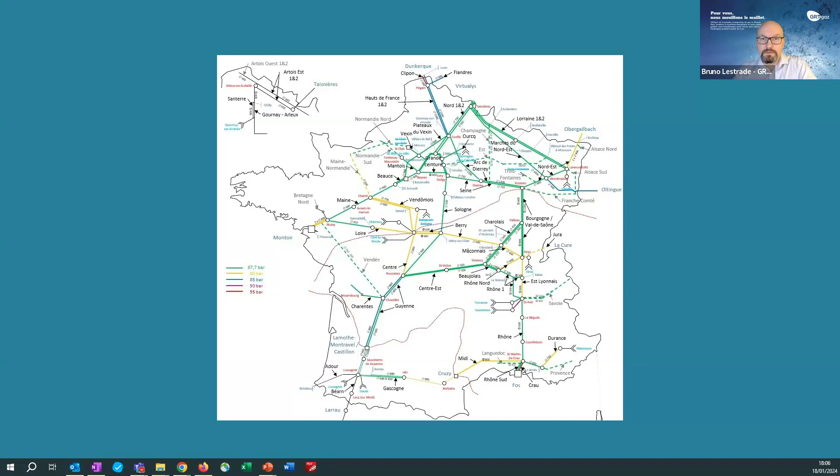If you can maybe switch back to the presentation. I don't know who is presenting. Alice, are you there? Okay, so I'm gonna present. Please come back. No worry. Alice? Sorry, I think I was disconnected. Let me. Can you present again?

Yes, sorry. No problem. So the idea was to bring together the best experts that we have at GRTgaz on one side and at RTE on the other side, and try to really bring on paper all the hypotheses you need to take into account when you start thinking on how to build a hydrogen network. As you may or may not know, hydrogen is mostly considered to be in the future produced by electricity conversion through electrolyzers, and this will require lots of power. So it will have an impact on the power system infrastructure.

And you have to decide, if you start to think on how to implement the infrastructure in the future, whether you're going to put the electrolyzer next to the consumption site, and therefore you will have to bring electricity to the consumption site, or if you put the electrolyzer at the production site, the electricity production site, and then, of course, transport that hydrogen to the consumer. And that was the start of that thinking in how do we decide what is the best option.

So we brought together the best estimate that we have on how the hydrogen market will be in the future, how much it costs to build hydrogen infrastructure. And because we wanted to make that study the most robust, we decided to make a consultation. We published at the end of 2022 the main hypotheses that we were going to take to conduct that study. And we sent that to our main stakeholders, and they had the opportunity to comment, to bring back different hypotheses, especially in terms of hydrogen storage.

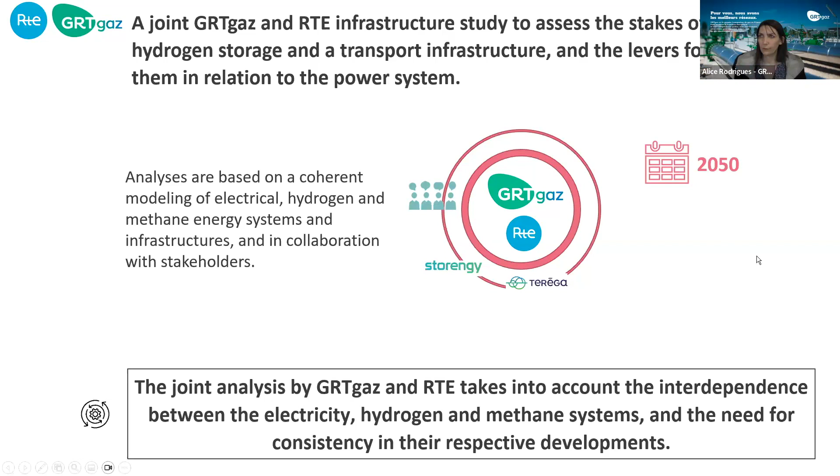The three main objectives. Well, the first non-objective was not to try to determine what is the best energy mix for the French electricity system. That was not the purpose of that study. RTE is looking at that. They made a lot of publications on that perspective. GRTgaz is also doing that for natural gas, biogas, and hydrogen. That was not the aim of that study. The study was just to try to see how you build an infrastructure.

So the first point was to try to see if you foresee a low final hydrogen market by 2030, by 2050, does it still make sense to build hydrogen infrastructure for such a low final hydrogen? That was the first thing we wanted to prove, or maybe not prove.

The second point was, of course, to try to draw the main costs and benefits that are associated with a flexible hydrogen system, and I will come back later on to the definition of what we consider to be a flexible hydrogen system. And then, of course, when you do such a study, you try to determine the sensitivity on your different hypotheses to see if you change one hypothesis, whether the result is changing or not. So those were the three main points.

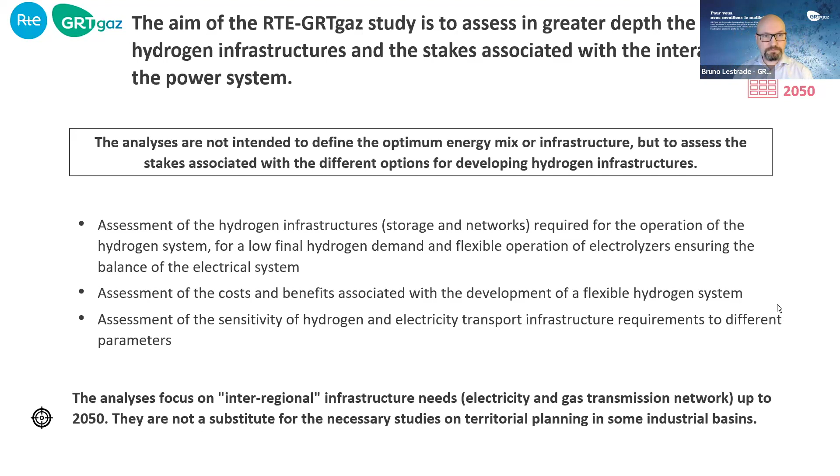And last but not least, because we are a TSO and not a regional or local system operator, we focused on the big picture. So we were looking at regional equilibrium, national equilibrium. We did not go into the detail of the main cities or the suburbs or stuff like that. We really looked at the big picture to start with. And the next slide, please.

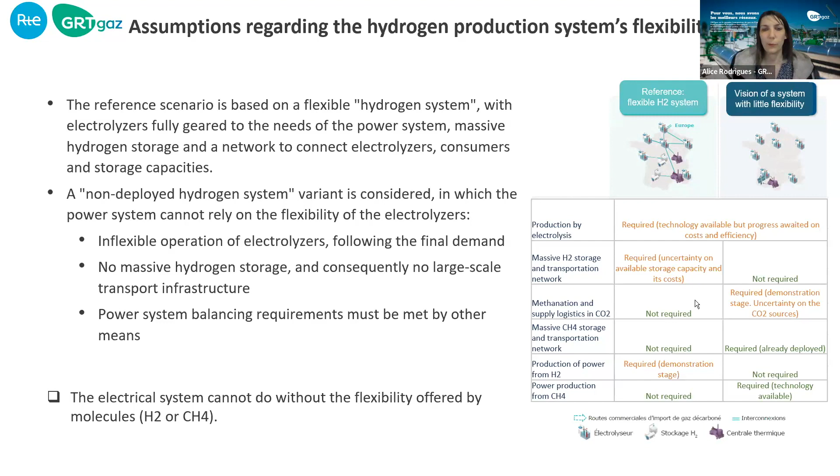And so, in the case where the electrolyzers are not flexible at all, it means that they are functioning all year long as well, no matter the availability of renewable electricity, which means that when there is a lot of renewable electricity available, there is a lot that is not valued because there are no electrolyzers for it. And on the contrary, when we are on the peak days where no renewable electricity is available, then the power grid needs to call for CCGTs to produce electricity.

But at the same time, the electrolyzers are still working. So we are in a sort of shadow situation where we are using methane to produce power, to produce hydrogen, with all the efficiency that we know when we multiply such combinations. And of course, we need the CCGTs, so we need a peak capacity to answer those situations.

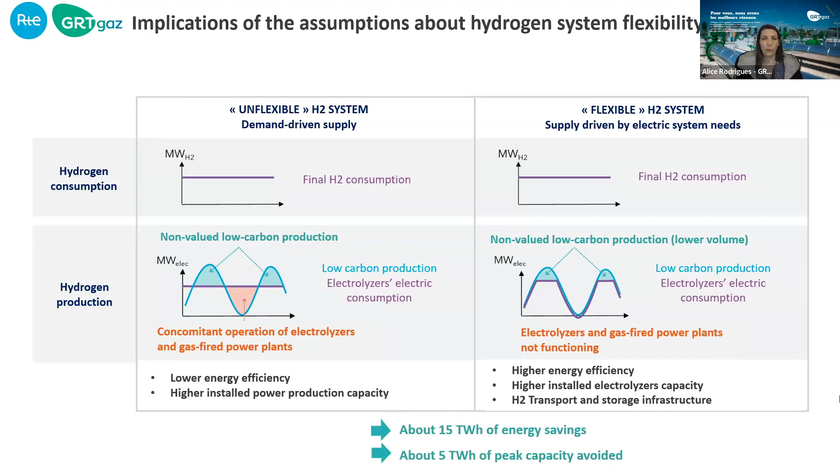One question about the production of hydrogen through electricity versus the production of hydrogen through the steam methane reformer. What are the advantages and disadvantages?

Well, if we speak of today, 2024, electrolyzers are only a beginning technology, so we don't have yet a lot of history and records about it, and therefore it costs more than steam methane reforming. But at the horizon of the study in 2050, we hope for the climate that there will be no steam methane reforming anymore. Well, that's the tendency that we see in all publications about the subject. That's what's in the Futurs Énergétiques. So that's the hypothesis that we have taken into account. Bruno, you're more expert than me on the technologies.

It's also that if we wanted to compare low carbon hydrogen production, you have to compare low carbon electricity electrolyzers with steam methane reforming combined with CCUS.

If you do so, if you consider only the SMR, you don't have an impact on the electricity network. However, you need a CO2 network. So that would have been a completely different study with a hydrogen network, CO2 network, and methane network. Because if you estimate that your hydrogen in the future will be produced by methane, then you will also have an impact on the methane network.

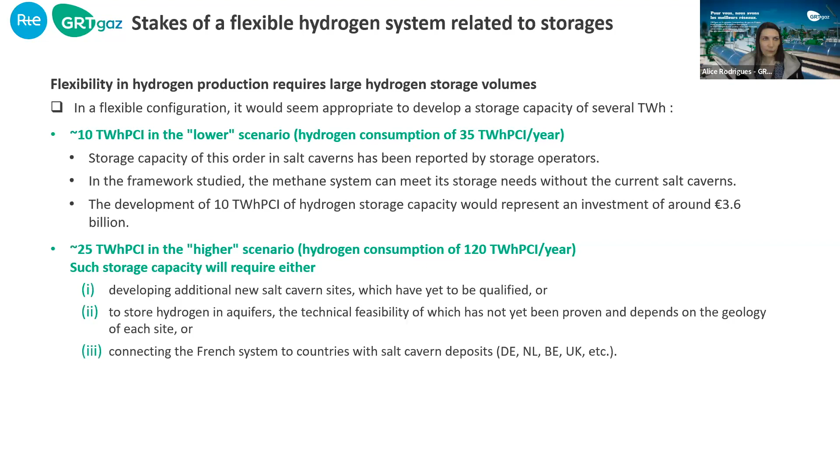Next slide, talking about money. If you can.

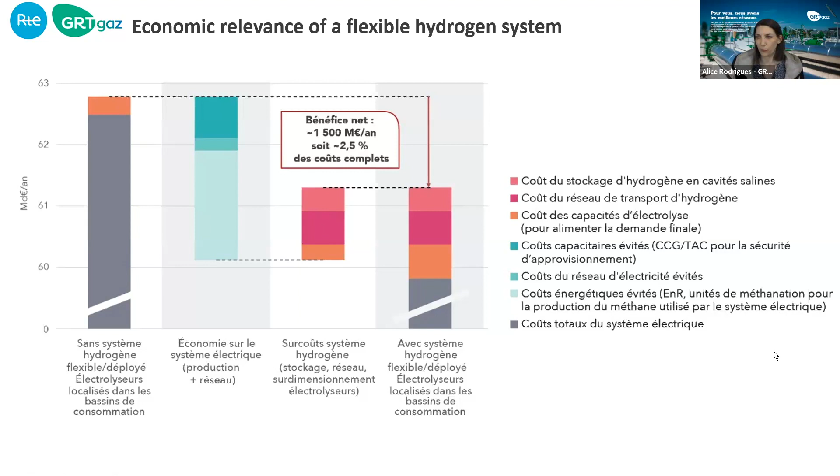There was a question; one of the objectives was to see if there is an impact on where we put the electrolyzer, if they're more near the consumption site or near the renewable electricity production sites. And in fact, it doesn't matter that much. We will see the economics about that, but again, we always need to connect the storages. No matter what the electrolyzer, we need to connect the consumption and the storages, which means that the final map is always more or less the same.

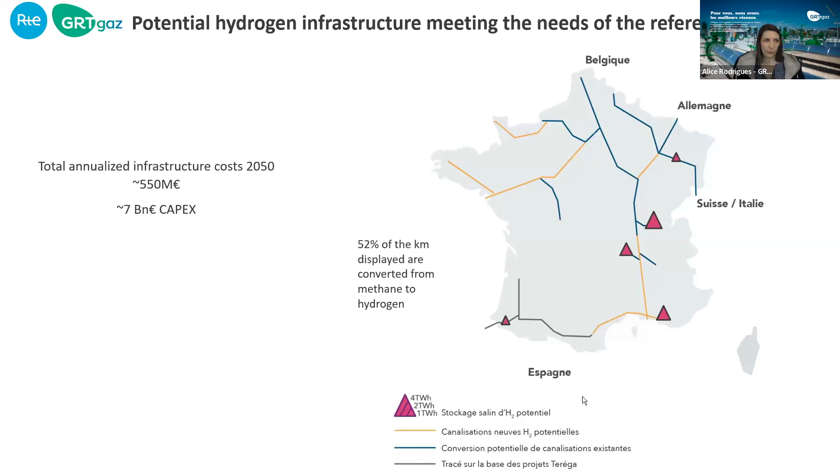So when we have shown those numbers and those maps to the public authorities, they have been a little bit impressed, because when you see all the network that needs to be built all at once, it may seem a lot. And so they asked, is there a roadmap that we could propose? And so we have tried to explain a little bit what would be the different steps of development of such an infrastructure.

First of all, again, always the same thing. First thing is to connect the storages to the hubs, the small little ecosystems. That's what we are already doing at GRTgaz. We are working, for example, on the Fos-Manosque area. Storengy is also working on its storage of Etrez. They also have a project called Storgr'Hyn. So that will be the first part.

Connect the storages. Then a second priority would be to connect the biggest industrial basins. The biggest one that needs to decarbonize its economy is around Dunkirk, but not only. And so that creates a sort of north to south corridor to connect the Dunkirk area, all the Grand Est region, and down to the south at Fos, where the future pipeline BarMar will arrive.

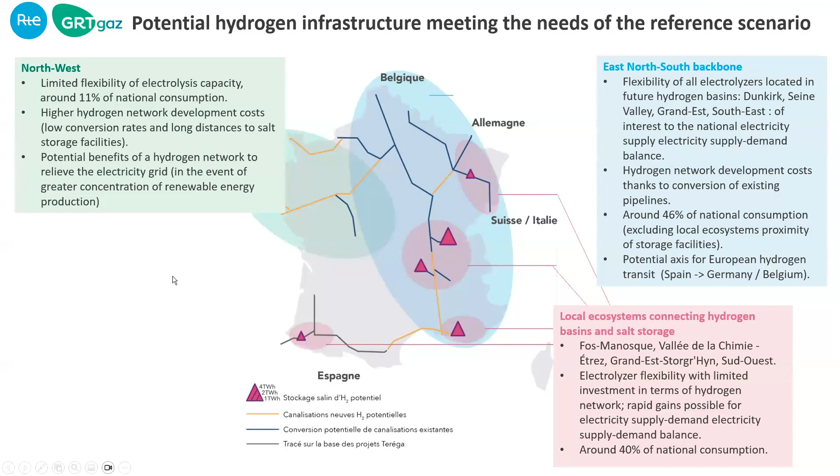Alice, can you hear us? Hello? I think she was disconnected. She's having issues with her bandwidth. Please bear with us while we wait for her to reconnect. Thank you for understanding. Alice, can you hear us? Yes. Alice, sorry, you were disconnected, so we lost you. Could you rephrase your previous paragraph? Yeah, of course. We lost the end of the former slide. Sorry.

Sorry about that. So I was saying that the lower priority region was the northwest zone, because it doesn't impact that much the flexibility of the power grid, and also it's further away from the storages, and there is less possibility to convert methane pipes. That's why it comes in third place. Now I wanted to talk a little bit about the place of the electrolyzers, the comparison of the economics if we put them near the consumption or near the production sites.

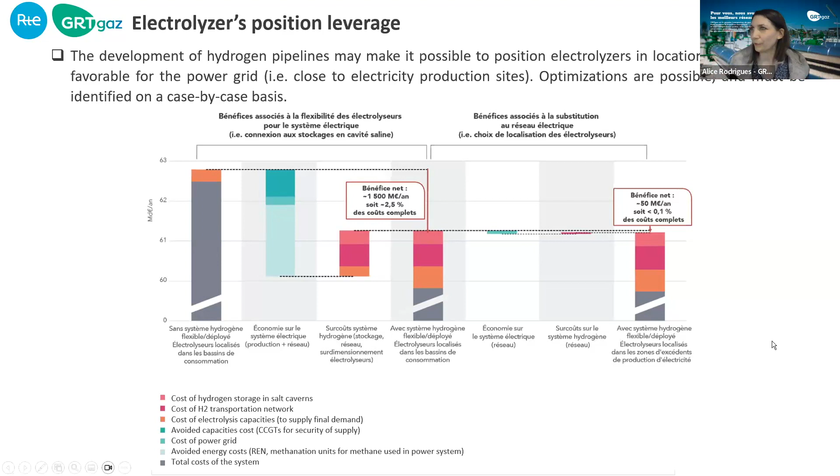And now I will conclude the study to say that the main benefit brought by an H2 system is that we can connect hydrogen basins and storage facilities, and that has a very big value both for the hydrogen network, of course, but also for the power grid. That's an important result of the study, because it allows the electrolyzers to modulate their functioning, and so to modulate the power consumption, and that brings a very important flexibility to the electric system.

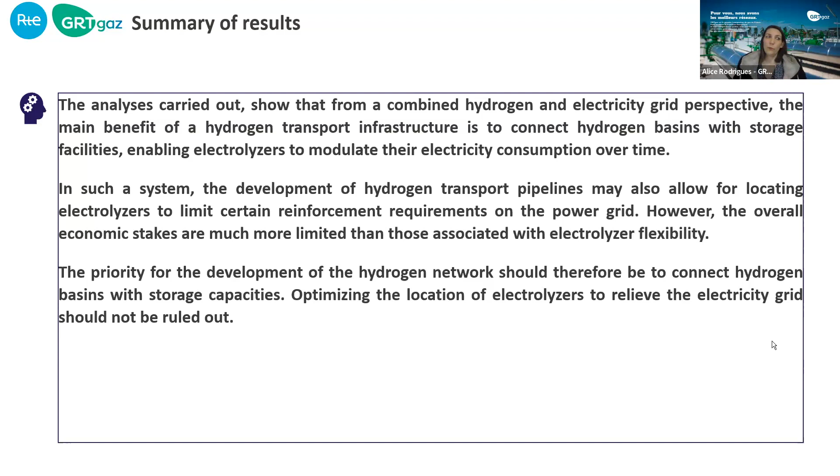Secondly, but not as important, the location of electrolyzers also brings some benefits, because it allows less reinforcement of the power grid, on a more limited scale, of course.

Question and answer session for the second part. So first question: what is the range for the storage capacity which has been taken into account for the costs?

So that was the consultation that has been confirmed by both Teréga and GRTgaz. And do I have numbers somewhere? I can send you the link to have a look at the public consultation where there are the numbers inside, because I'm not sure that they gave the detailed size of each storage.

But this is, of course, very approximate data, because so far it's still an ongoing process to fully determine the size and the economical size of the storage. Okay, thank you very much.

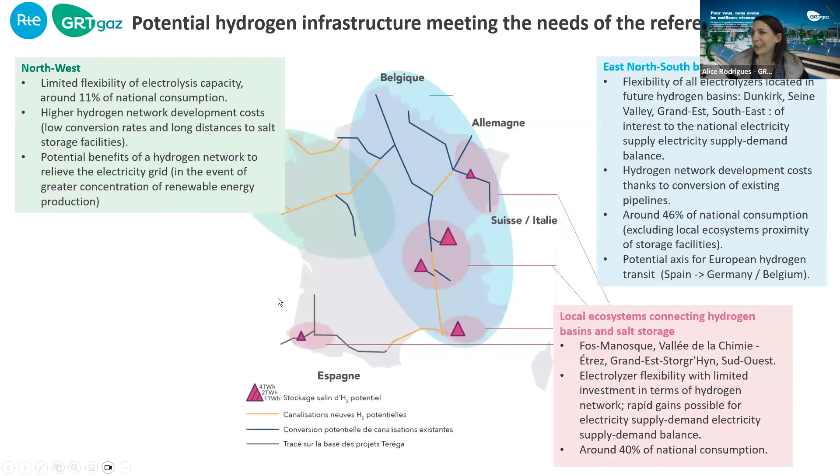In the presentation, there were the figures 35 and 120 terawatt per year. What percentage of the total electricity does it represent? This is a significant part because the electricity consumption in the N2 scenario is up to 650 terawatt. Yes. So you need to take into account the yield of the electrolyzer, but all those data are in the report. That's why I sent the link in the Q&A. You will find more information on all the types of hypotheses that we took.

Actually, this is coming from RTE and their scenarios on what will be the evolution of the electricity consumption and production in France by 2050. Thank you.

Next question. Again, the aim of that study was not to criticize positively or negatively those scenarios. The question was, if we assume that those scenarios are right in terms of electric consumption and hydrogen needs, what is the best option to bring that hydrogen to the consumer? That was really the focus of that study.

And another question by Nicholas Goldet. What is the cost of the hydrogen production in terms of energy consumption as well as the overall economics and money? Very interesting question, but I don't think that we have the answer because we are not a producer, neither is RTE. So the cost of hydrogen is something very speculative at the time.